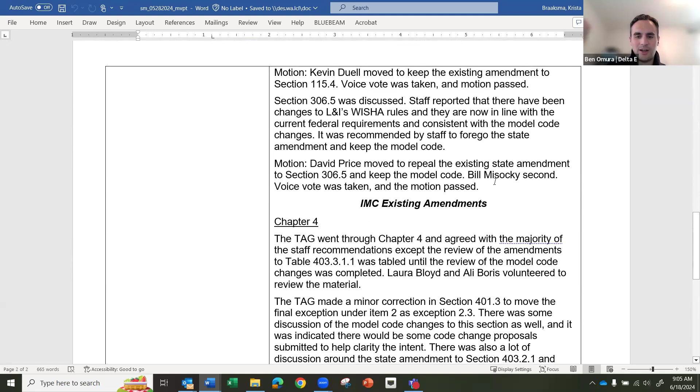Motion passes, thank you. All right, next item, this is the Tuesday, May 28th meeting minutes. I don't know if there's anything on here. Everyone's reviewed this, any comments or discussion, or are we good to move to approve the minutes? Move for approval. All right, motion to approve the minutes, is there a second? I'll second the motion. All right, motion and second. All those in favor, please say aye. Aye, aye, aye, aye. Any opposed? All right, passes.

And then we have the May 31st edition. All right, similarly, any discussion here from anyone? Move we approve the minutes of the May 31 meeting. Is there a second? I'll second. Thank you, all right, any further discussion? All right, hearing none. All those in favor, please say aye. Aye, aye, aye, aye. Any opposed?

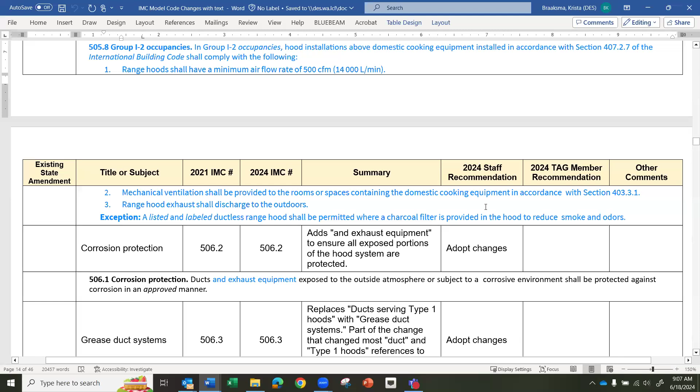All right, okay, to item 4 here. So Krista, please remind us where we left off. Okay, our last one was looking at the 505.7 and 505.8 on the new Group I-1 and I-2 occupancy requirements for hoods, and that brings us to 506.2, where it adds an exhaust equipment exposed to outside atmosphere shall be protected against corrosion.

Okay, great. And then I guess before we get into it, I know Dustin, you're on the call, and we had the committee meeting last week to discuss a little bit on the timeline, but I don't know if you or Krista could reiterate kind of where we're falling now with the report and moving forward in the process.

Yeah, I'd be happy to speak on that a little bit. So all the tags are not quite done with the reports, and so talking with the tag chairs and then asking the tag groups a question about our proposal periods. We are looking to open our proposal period here at the council meeting on Friday for a period of 90 days. That's going to be my ask of the council. And what that's going to do is be a little bit longer than our required proposal period of 60 days. It'll get the proposal period going and allow for people to continue to submit proposals after our reports are complete.

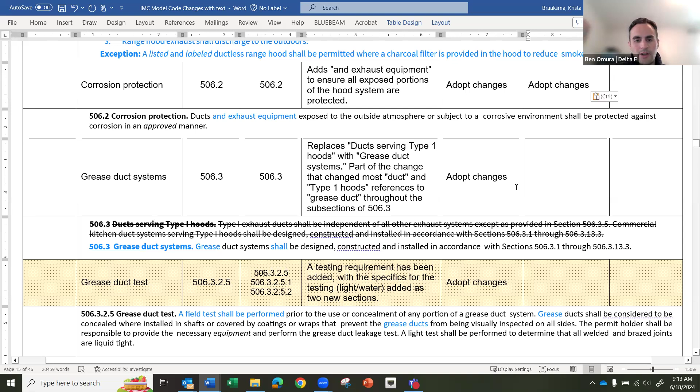Any discussion on this section from tag members or others? Hearing none, all those in favor of recommending adoption of the model code change to section 506.2, please say aye. Aye. Aye. Aye. Any opposed?

Okay, 506.3 is another one of those changes where they changed duct serving type 1 hoods to grease duct and just kind of simplified the language.

And I don't know, obviously we don't have the purview to look at making significant changes here, but it would be interesting to make sure that the requirements that were previously in 506.3 are still incorporated elsewhere. So it looks like they previously had an independent system requirement and maybe a couple other things incorporated here.

So looking down to 506.3.2.5, the grease duct test, is this the same test that was required previously when they were calling it class 1 hood duct, or hood ducts serving class 1 hoods or type 1 hoods? Is this the same test, or are there any additional requirements?

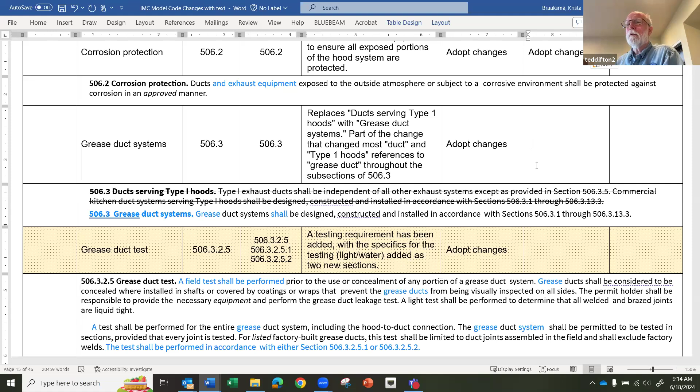I believe it's the same test. Well, there's actually two different tests that are now allowed as well. Correct. Yeah, I believe the pointers still direct you to this section for type 1 hoods. And I think either previously or as part of the exhaust section, the type 1 hood requirement would direct you into a grease duct system as well, which would then require the testing.

So basically this is a language issue that we're dealing with and getting it all on the same page. With that, I'll make the motion that we combine 506.3 with 506.3.2.5 and recommend approval of both of those sections.

Okay, there's a motion on the table for recommending adoption of model code changes to 506.3 and 506.3.2.5. Is there a second? I'll second. Yeah, all right. So the motion is seconded. Any discussion here?

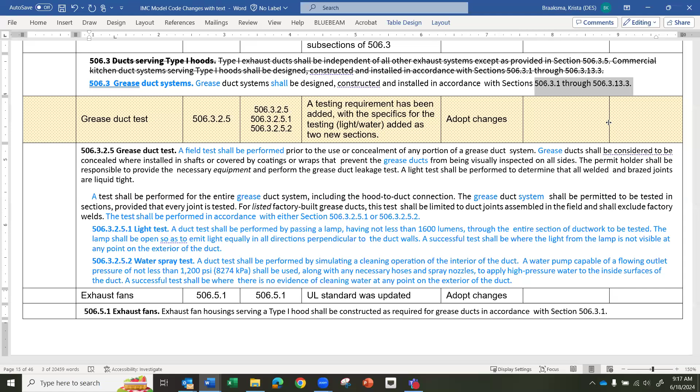Just a quick friendly reminder, type 1 hoods, would that service multifamily that's now being jacked into the commercial code? Well, yeah, I mean the type 1 hood requirement could be driven primarily by commercial cooking appliances.

And type 2 is for the smaller ones over the range. I'm just looking for clarification this morning. I'm sorry, I'm a little off. That's fine.

And residential appliances, the requirements for those can also vary. Like your typical range hood in a dwelling unit would not be considered a type 2 hood or a type 1 hood.

There's some other sections that will define what type of hood you would need for different applications and occupancies. My focus was that this type of testing isn't typically done in the residential world, so I was checking if we were including a new form of testing that wasn't there prior.

Understood. Once we get through the initial recommendations, if something comes up as potentially problematic or pushing undue cost, I don't see a significant change for cost requirements here, but we could look at that further.

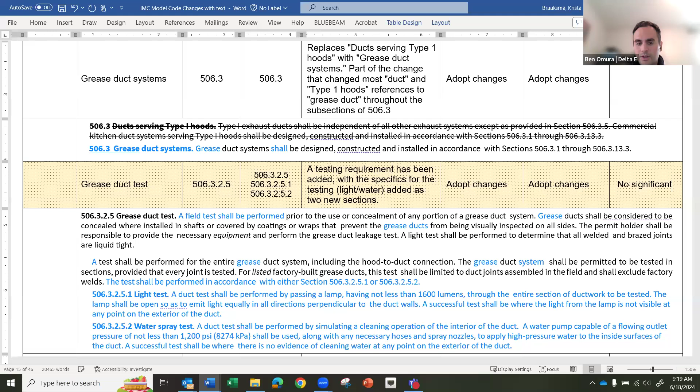Any other discussion or topics for this? Hearing none, all those in favor of recommending adoption for sections 506.3 and 506.3.2.5 model code changes say aye. Aye, aye, aye.

Next is 506.5.1, and that just changes the reference from 762 to 705.

I move we recommend adoption of this change. Is there a second? I'll second. Any discussion on this? It's my understanding as well that it's an update to the UL listing for these types of fans.

Hearing none, all those in favor of recommending adoption to section 506.5.1, please say aye. Aye, aye, aye, aye. Any opposed?

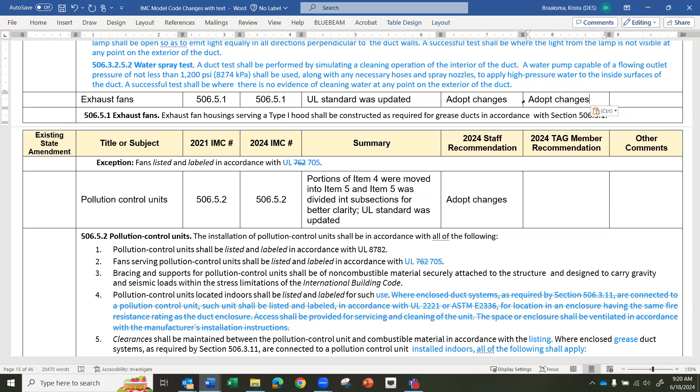506.5.2, the same change to the UL standard. Portions of item 4 were moved down to item 5 and broken out into individual subsections for clarity, so editorial more than anything.

I move we recommend adoption of these changes. Motion on the table, is there a second? I'll second. Any discussion here? Definitely appears like it's mostly editorial, similar to the fans update to the UL standard.

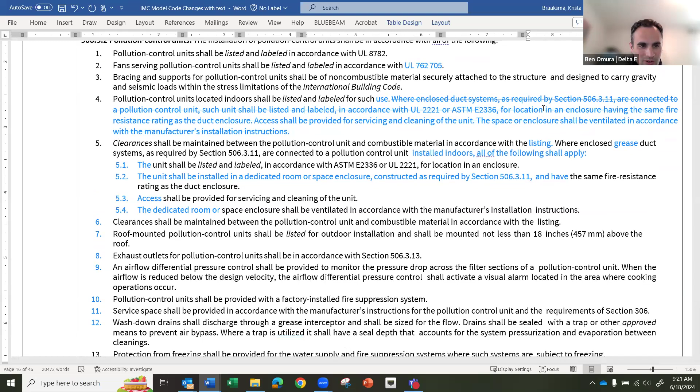All those in favor of recommending adoption to section 506, what is it Krista? 506, scroll up a little bit. 5.2, please say aye. Aye, aye, aye, aye. Any opposed?

507 commercial kitchen hoods - this was reorganized fairly significantly. This is a cover over all the changes we're going to look at here. They basically broke it into general, type 1 hoods, type 2 hoods, and light duty appliances was all moved into the type 2 hood section.

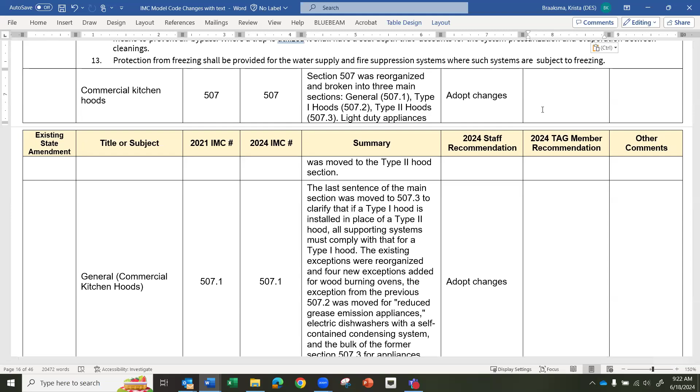507.1 had some language moved into 507.3. If a type 1 hood is installed in place of a type 2, all supporting systems must comply with type 1 hood requirements. Some new exceptions were added for wood burning ovens, and a couple for different UL listed appliances.

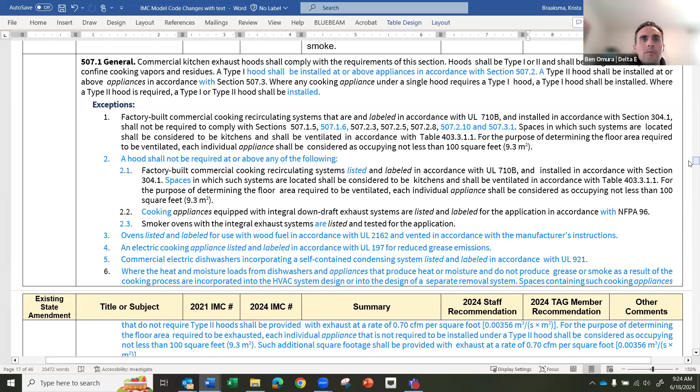Trying to fine tune my scrolling. Okay, so everything with the blue text is a change for the 2024 code.

Any initial discussion here for this section? I think there's probably more to unravel and align potentially with some of the allowances we have for different cooking applications, especially with exception 6 here.

I'm noticing that exception 6 used to be in the type 2 section, and now it looks like they've added that into the type 1 section, which I think is fine, but just a comment that the exception existed before under the type 2 hood section, I think that was 507.3. Right, and this is a general section rather than a type 1 section.

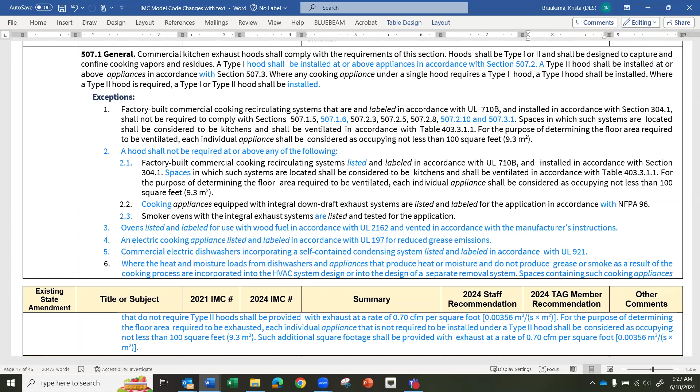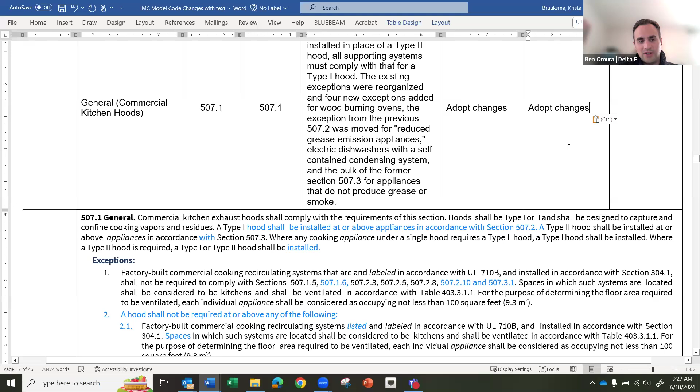I know the 0.7 CFM is the typical exhaust rate for a kitchen space as well, so that aligns and has been the go-to. Any other thoughts before moving to recommend adoption? Hearing none, all those in favor of recommending adoption of model code changes to section 507.1, please say aye. Aye, aye, aye, aye. Any opposed?

507.1.3 - they've added some specific requirements for using draft hoods or atmospheric burners in the same space containing a type 1 or type 2 hood. It looks like, Krista, you had marked this as potentially significant.

It kind of got there before, but now it has specific requirements. It used to just say provision shall be made, and now it specifies a self-closing device in a sealed enclosure. So it's a big change, but it might not have any additional cost because it was pretty much a requirement already - it just wasn't spelled out as specifically.

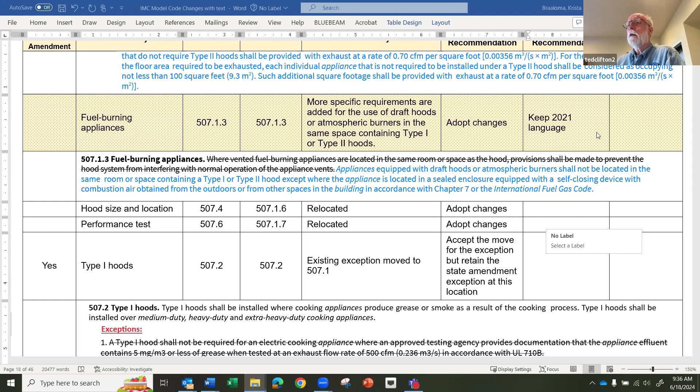I think, as you have it noted in the crosshatched area there, keeping the 2021 language would be my motion—that we recommend they keep the 2021 language, because this is ambiguous at best and could be very confusing in the field for inspections and such.

Well, it does use the term atmospheric, which means if you're underneath a type 1 or type 2 hood, you're not an atmospheric type device. Again, this would only be stuff that's being non-vented purposely, other than a pipe that's letting passive nature take care of itself. But Jonathan, I think you're assuming a certain definition of atmospheric burners, but a burner on a stovetop is an atmospheric burner.

Yes, and I agree with Ted, because if you read it, it can be moved into, because they just use the broad term kitchen appliances or equipment. So where are they going to draw the line, as it may cause confusion? They'd have to redesign the entire kitchen and put atmospheric appliances or regular stovetops or other equipment in a separate room, which I don't see. Maybe larger kitchens could afford it, but a smaller restaurant, there's no way. So from an inspection point of view, I would go with Ted to keep the old language, unless they can provide more clarity.

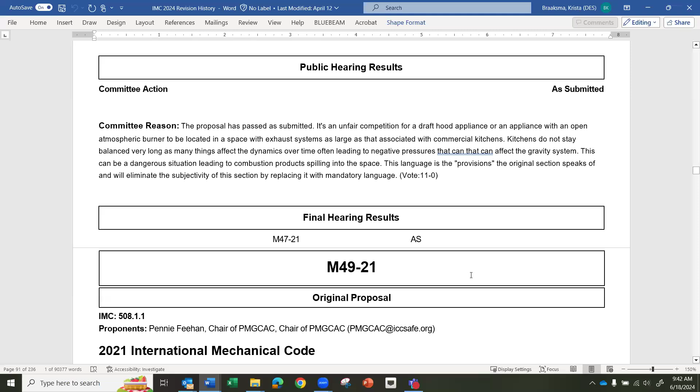Yeah, looks like, Krista, you pulled up this change proposal at the model code level. Right, this was adopted, the original proposal for the 2024 code, and it doesn't look like it had any public comments after the committee action. Looks like the language is similar, maybe a little bit... actually it looks the exact same. So I think the intent appears to be clear.

And thank you, Laura, for going through the commentary section. But that's not what's written in the section as well. So yeah, I think it definitely seems a little problematic and probably not great language as it is. But so, motion and the second to recommend retaining the 2021 language, and obviously we'll leave it there. Any further discussion?

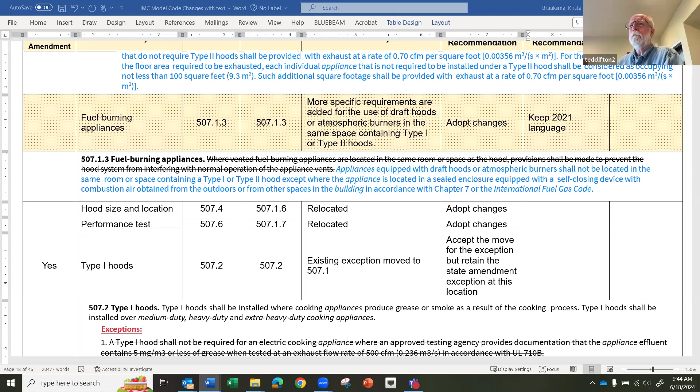All right, all those in favor of the motion to recommend keeping the 2021 language for section 507.1.3, please say aye. Aye. Aye. Any opposed?

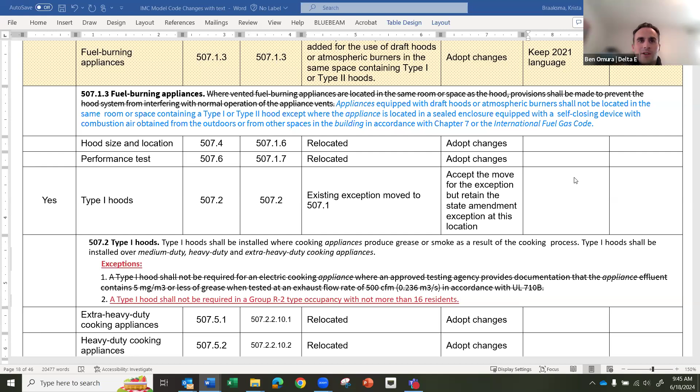Old section 507.4 was moved into 507.1.6, with no change other than numbering. Same with performance testing, 507.6 went to 507.1.7. These are all editorial changes, just numbering changes, not even editorial. So I don't know if you want to even address them as numbering changes. If the language is the same, yeah, the language remained exactly the same and just the number changed, moving them into that general section.

507.2, type 1 hoods. The existing exception was moved into the general section 507.1, and then we had that state amendment for type 1 hoods. There was discussion during the review of existing amendments that someone might want to pursue a code change proposal to ensure this wasn't exempting them from hoods entirely. I think this was consistent with things we talked about at the last meeting.

I will move that we recommend adoption of this change. That's for 507.2, Ted. Yes, 507.2. Is there a second?

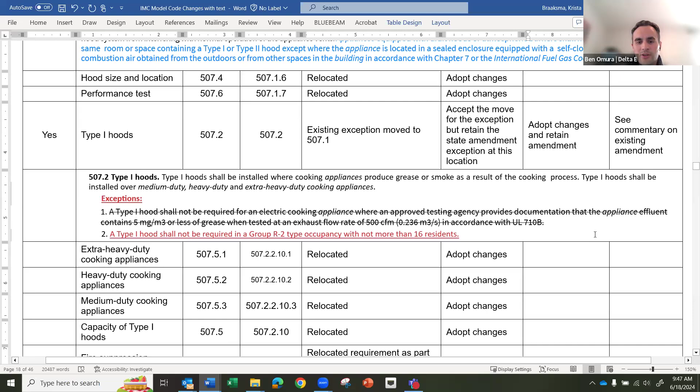Krista, really my understanding is that this is just exception 1 got moved into 507.1 that we already looked at. Right, this is, but exception 2 is still remaining in 507.2. Right, except it's now exception 1. Right, or just exception.

Is there a second to Ted's motion? I'll second. Motion seconded. Any further discussion? Hearing none. All those in favor of recommending adopting changes to section 507.2 based on model code changes, please say aye. Aye. Aye. Any opposed?

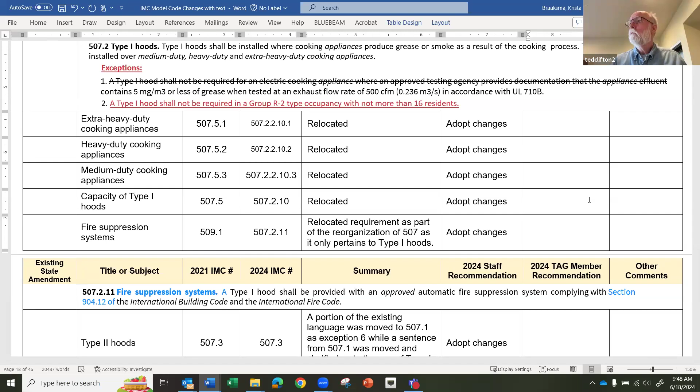507.5.1 through 507.5.3 were all relocations, just numbering changes without changes to the text at all. Same with 507.5, which was moved to 507.2.10. I guess that should be actually above the other ones, but my numbering skills weren't up to snuff on those.

509.1 was moved to 507.2.11, with minor editorial changes and a new title. Any discussion here? What was this one previously called?

I'll move that we recommend approval of 507.2.11. Yeah, this was previously titled 'Where Required', so it provides a specific code reference, so instead of where required, it's more clear.

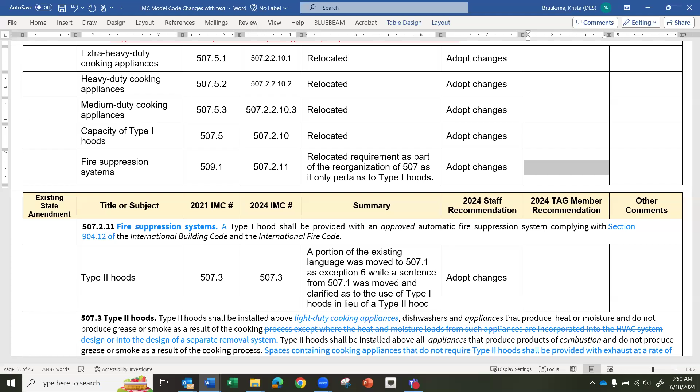Is there a second? I'll second. Motion is seconded. Any further discussion? All those in favor of recommending adopting changes to 507.2.11, please say aye. Aye. Aye. Any opposed?

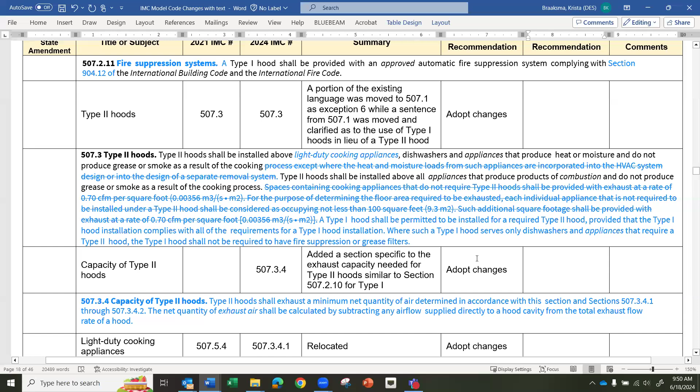Okay, 507.3. The struck sections were moved to 507.1 as part of exception 6. And some of 507.1 was moved in here since it pertains only to type 1 hoods used in lieu of a type 2.

Interesting. I move that we recommend adoption of 507.3. It seems consistent with the language we've been working through on similar issues all the way through here. Is there a second? I'll second. So motion is seconded.

Any discussion here? I guess one key thing to note is that they've included light duty cooking appliances into the requirements for a type 2 hood. Previously, it didn't have that specific reference, it just had appliances. That just makes things clearer.

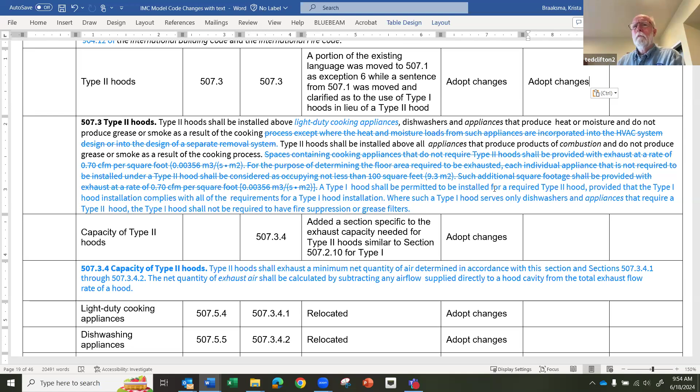New section 507.3.4 states what the necessary exhaust capacity is needed for type 2 hoods. There's a similar section 507.2.10 for type 1, and they just duplicated it for type 2.

Got it. Yeah, I think this is since they've kind of indicated light duty for type 2. Now I think they've moved the CFM per linear foot table on here. I see that as the next line item, noting the relocation.

Any other discussion for this one? This makes sense. I'll move we recommend approval of 507.3.4. I'll second it. Motion is seconded. Any further discussion? Hearing none, all those in favor of recommending adoption of the model code change for section 507.3.4, please say aye. Aye. Aye. Aye. Any opposed?

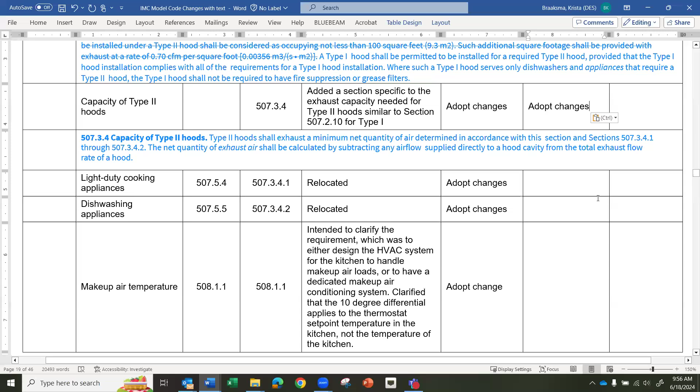And then 507.5.4, 507.5.5 were both moved up to be subsections under that new section 507.3.4, but no changes beyond just the numbering. Right.

508.1.1, makeup air temperature. Reworded to clarify how you design the system to handle the loads, whether or not you need a dedicated makeup air system.

Yeah, this is one of my favorite sections. It's always been super confusing the way it's written. And then how to apply the 10-degree temperature difference.

So I don't necessarily think the model code change solves the issues, but it maybe is a step in the right direction.

I'm going to move that we recommend adoption of this change, and if there's a second, we can have discussion. Is there a second? All right, we can't move on unless there's a second, or we'll have to move on to another section. I apologize, I'm having some technical difficulties with equipment. I'll second for Ted. All right, motion seconded. All right, Ted, what you got?

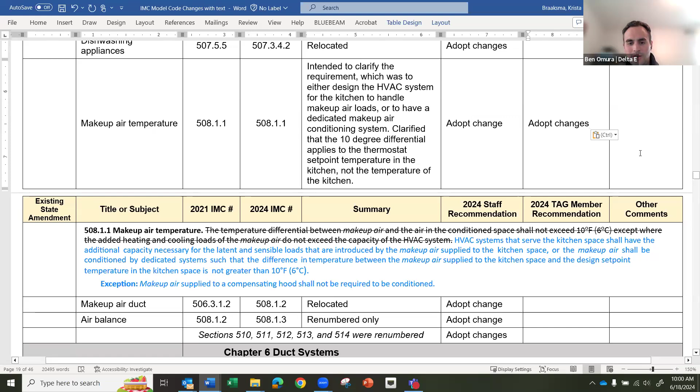Any other discussion for this one? Hearing none, all those in favor of recommending adoption for section 508.1.1? Aye, aye, aye, aye. Any opposed?

Okay, makeup air ducts and air balance were both just relocated and renumbered. And sections 510 through 514 were similarly just renumbered and unchanged based on the reorganization of section 507, well, mostly 507.

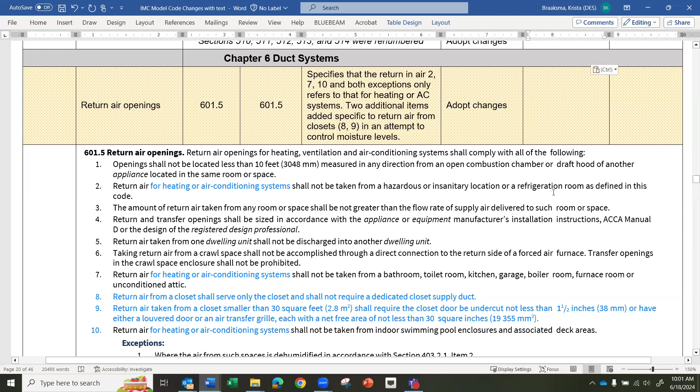All right, moving into chapter 6, return air openings. Specifies that the return air in 2, 7, and 10, and both exceptions, only refers to that for heating or air conditioning systems. Two additional items were added specific to return air from closets in an attempt to control moisture levels.

So a quick question on that: how does that relate to ventilation? We see a lot of return air into the ERVs, potentially coming from the bathrooms or from the shower spas. So this excludes for heating and/or air conditioning, but it doesn't necessarily exclude from ventilation. So we take from that, ventilation is an acceptable location?

Well, to start with, your return air to an ERV is coming directly from outside. It's your exhaust air in the HRV that is going to the outside, being returned from the bathroom to the outside. It's not return air, it's exhaust air. Okay, so you're qualifying return air as being outside air? The return air is, well, in the case of an HRV...

In the case of an HRV, you've got outside air coming into the house, and you've got return air going out of the house, and that return air can come from bathrooms or other places where you need to otherwise ventilate that room. So really, it's not return air at all, it's exhaust and supply air. Exhaust air, exactly. Exhaust and supply air, okay. Yeah, exhaust and supply would be the right terms for that, and return air wouldn't actually be an appropriate name for that. Okay, so that makes more sense.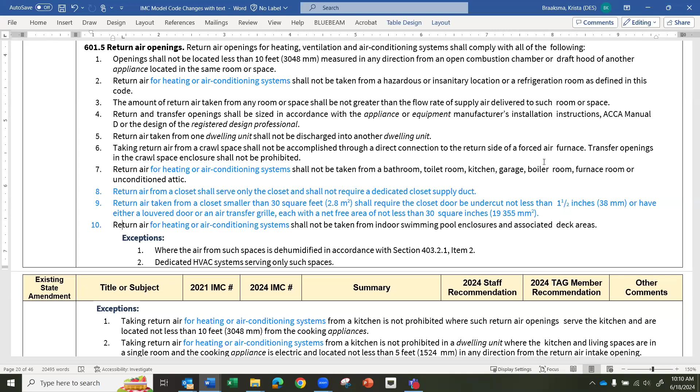Are we able to get a little bit more in depth with our recommendations for approval by saying something's effective? Requires approval of this requires a clear definition with regards to HRVs and ERVs.

So for this section, since we've kind of discussed previously, we can recommend not adopting the model code changes and using the language from the previous code cycle, is my understanding. And then we could flag it as potentially needing a code change to either clarify a definition or clarify the section. But that wouldn't necessarily be part of the initial report unless we had the language that we wanted to use developed.

Perhaps with number 7, they're trying to be specific and not exclude ERVs - that's my understanding of how this is. Return air for heating or air conditioning systems is very specific: should not be taken from bathroom, toilet room. Whereas other items here could be applied to heating, ventilation, and air conditioning systems, but they're adding the specificity of the systems in number 7.

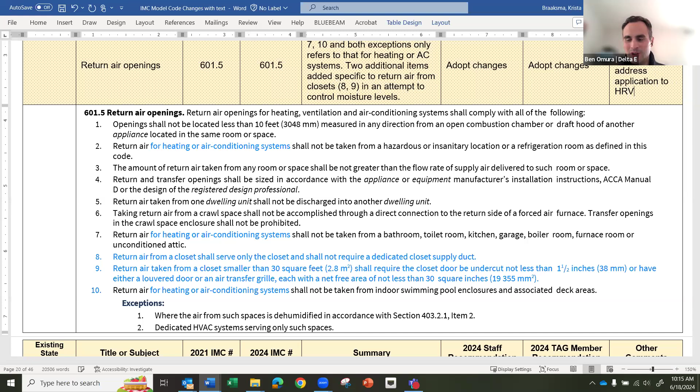Anyone want to volunteer for either taking on the assignment or sharing the assignment? Okay, if not, I guess we'll need to assign someone to that. Ted, I don't know if you want to be a part of that, or is there someone else that would like to throw their hat in? Yeah, I've never done a code change proposal and I really don't have time to start right now.

Right. If not, we can leave it as something that we assign following the meeting and keep moving. So, I'll leave it there unless someone wants to speak up.

When would be the due date for that particular code change proposal? So as Dustin mentioned earlier, the proposal period, which would be a 90-day window, would potentially open following the council meeting this Friday. So obviously that's the deadline to get proposals submitted, I believe. Yeah, so pretty much 90 days from now.

Jonathan, have you ever written a code proposal? Last code cycle, I got my toes wet a little bit, so to speak, but I did have help from great people. So I wouldn't mind doing this again as long as a couple of folks wouldn't mind chiming in and giving me some help with it.

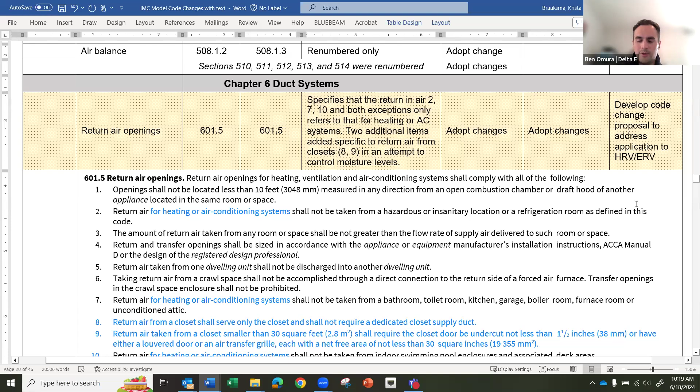With that, any further discussion? All those in favor of recommending adoption of model code changes for section 601.5, and indicating that we're going to have a group led by Jonathan to develop a code change proposal, please say aye. Aye.

602.1 was split into a general section with 3 subsections, pretty much all editorial. There is an existing state amendment.

I'll move to recommend adoption of 602.1.1, 602.1.2, and 602.1.3. Is there a second? Second. All right, so the motion is seconded. Any discussion here?

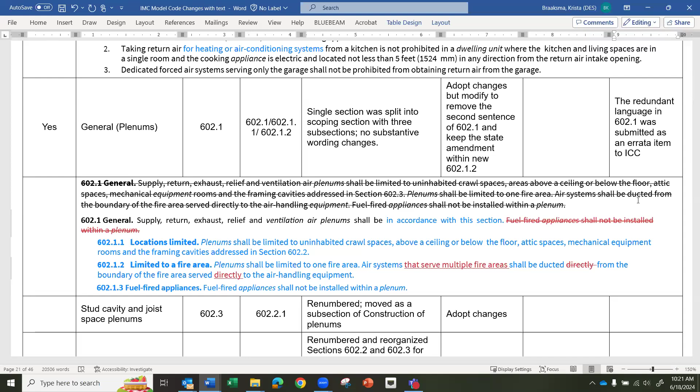I did submit this as an errata item to ICC because they kept the fuel-fired appliances shall not be installed within a plenum language, and then had that also as language in the new 602.1.3. So I think that was just an editorial error on their part for the first edition. Got it. So did we discuss this during the state amendments section, Krista? Either way. We did, I don't remember that we had anything specific to say about it. Okay, yeah, I wouldn't think so. I think it makes sense that we wouldn't need that language twice.

Any further discussion for this one? Just to be clear, the strike-through for the fuel-fired appliances, that's in the model code. They have it listed twice in that area, and then 602.1.3 as well.

All those in favor of recommending adoption of model code changes to section 602.1, including subsections, as well as the staff recommendation to strike the redundant language, please say aye. Aye. Any opposed?

602.3 was moved to 602.2.1, just to be a subsection of construction of plenums, but there was no language change, just the numbering change. Materials within plenums was renumbered, but it was also revised for clarity.

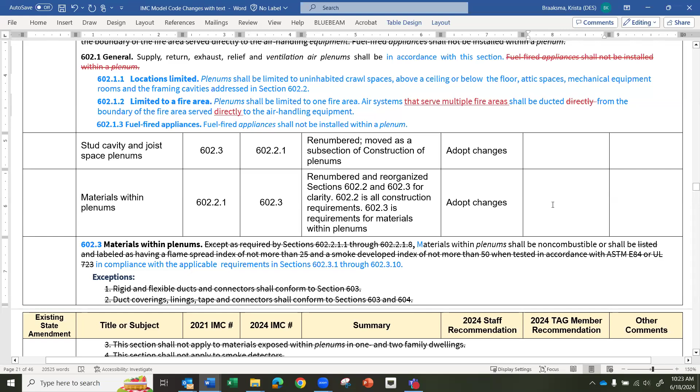And it had material moved into 2 new subsections. I would recommend adoption of 602.3 and its subsections down through 602.3.2.

I would second that, but I would caution that number 1 is in conflict with the energy code. But this is commercial, so I may be wrong here, I am not a commercial expert. I backtrack, I apologize. But it does say 1 to 2 family dwellings here, which is why I said, see, I knew I wasn't too crazy, just slightly crazy. It says plenums in 1 and 2 family dwellings, which is residential code. Residential code says you will not use plenums at all for delivering ductwork system, whether it's ventilation, heating, or cooling. This could be like an R2 occupancy in a commercial building, of course.

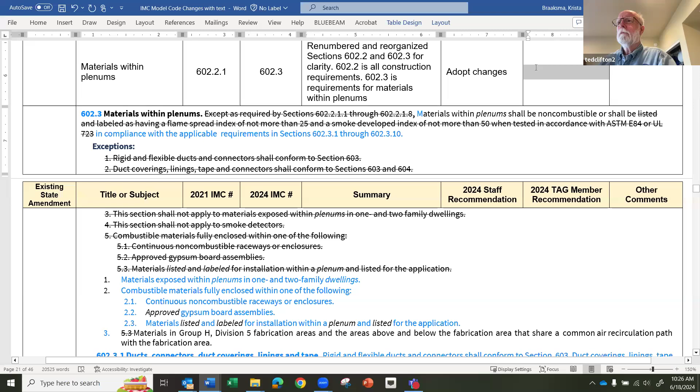All those in favor of recommending adoption for model code changes to section 602.3, including subsections, please say aye. Aye. Any opposed?

And Krista, have you, on the staff side, looked at any alignment with NEC requirements or other similar requirements that might have already been existing? Looking at the code change proposal at ICC, this was in alignment with the NEC, and this was just included in the mechanical code for convenience. They had the same UL listing requirement.

I'm curious what the word discrete means here. Does anybody have a clue there? Is there a definition somewhere? I don't think there's an official definition of it. I'm not sure when or if they've always been using that language. When I think of discrete, I think of having my clothes on. So, but if I applied that definition, this would occur to bare wires, for example, as not being discrete, whereas a jacketed wire would be discrete under that definition of discrete. But why is that word in there, and what does it mean?

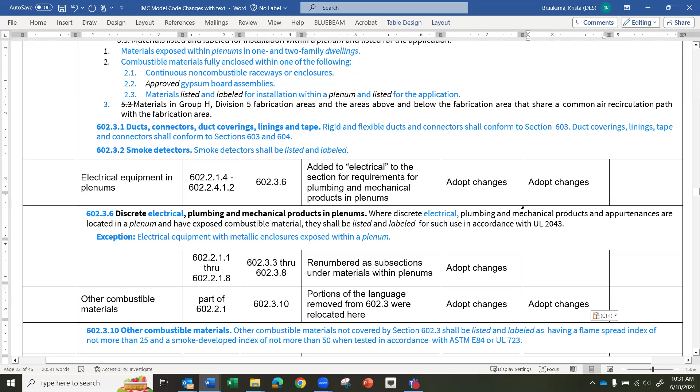All right, any additional discussion? I don't know if we look at 602.3.10 much. And this is, it looks like, Krista, this was moving language from previous 602.3. Right, this was just part of 602.3 that got moved into its own specific section for other combustible materials. Got it, okay.

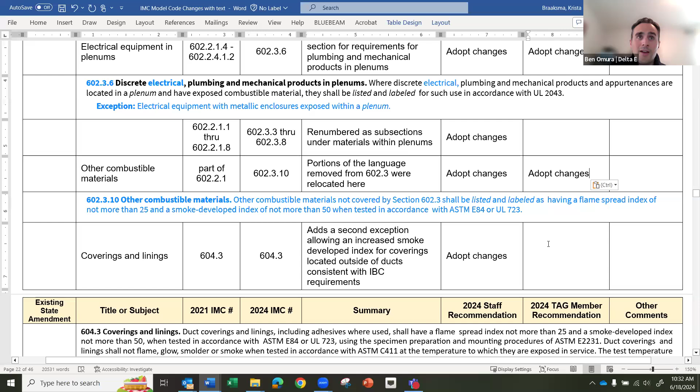All right, any other discussion for these two? None. All those in favor of recommending adoption of model code changes to 602.3.6 and 602.3.10, please say aye. Aye. Any opposed? Okay.

604.3 added another exception allowing an increased smoke developed index for coverings located outside of the ducts, consistent with the IBC.

I'm just trying to recommend adoption of these changes. Motion to recommend adoption, is there a second? I'll second the motion. Any discussion? I was just trying to parse through the difference between the main section requirement and the new exception. They're very similar.

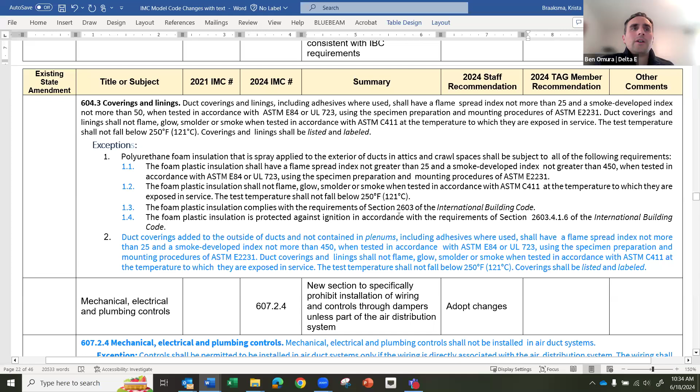A new section 607.2.4 prohibits the installation of wiring and controls through dampers unless they're part of the air distribution system. And then there's the subsection that says you can't do it unless it's allowed by their listing. And then, yeah, the section after this is for not installing through fire smoke dampers or fire dampers.

So move that we recommend adoption of 607.2.4 and 607.2.4.1. Second. All right, motion is seconded. Any other discussion here? I don't know.

I think the exception language is a little bit ambiguous. I think it probably makes sense to allow it for sensors and other things that are needed within the duct, but I don't know if anyone's really doing this, but using the duct as like a pathway for your control system or something like that, which serves the air handling system, but really should be routed outside of the duct, because it would still be related to that same system. But...

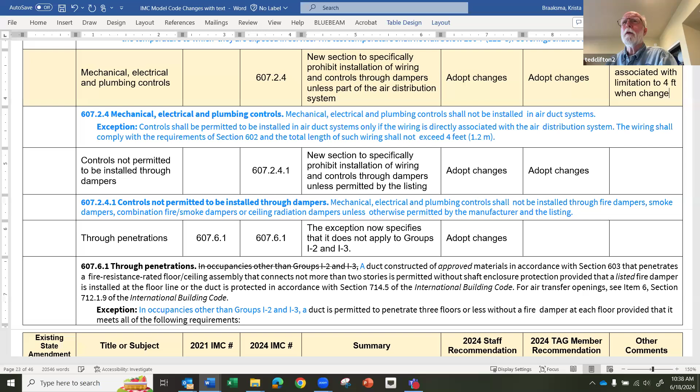And I guess we have a motion on the table for, or do we have a motion? I don't know, I think I had made the motion for 607.2.4 and 607.2.4.1, and I think Laura seconded it, if I remember right. That's correct. Yeah, based on Brad's feedback, it does seem like it would make sense to flag it for a significant cost change.

If there's something we'd like to develop, there's a code change proposal we want to get on the tracker or list for upcoming things we want the tag to look at. Let's think about that. Any other discussion for the motion on the table?

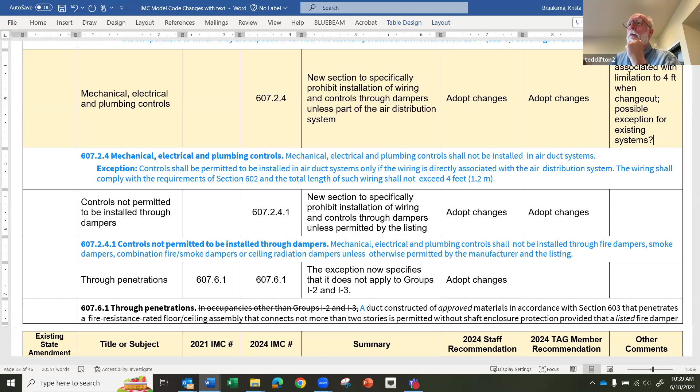I would accept what you wrote in the right-hand column about cost association being limited to 4 feet when change-out is possible, with an exception for existing systems. I'd accept that as a friendly amendment to my motion. Laura, do you accept that also? I was just curious how they came up with the 4 feet. But yeah, I can second that amended motion.

Any other discussion? All those in favor of recommending adopting the model code changes for 607.2.4 and 607.2.4.1 with the flag of significant change and opening up the opportunity for a code change proposal, please say aye. Aye. Aye. Aye. Any opposed?

Okay, so 607.6.1. Rather than noting occupancies other than Groups I-2 and I-3 at the beginning, they stuck that language into the exception instead. So it specifies that it does not apply to Groups I-2 and I-3. Basically the change is that the exceptions do not now apply to Groups I-2 and I-3, but still apply to everything else. And the main paragraph would now apply to Groups I-2 and I-3.

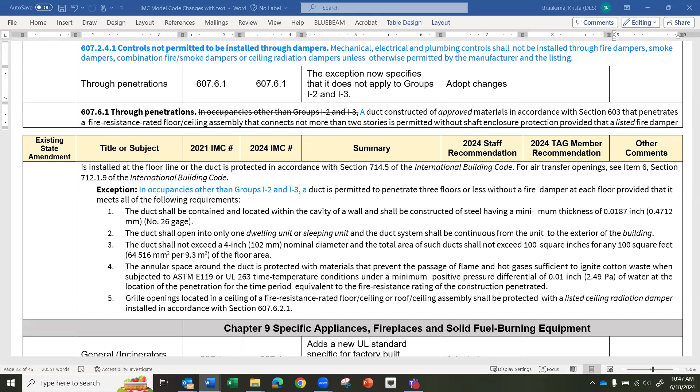Yeah, it looks like in the IBC it read the same previously. I don't have the code changes for the IBC up, but it looks like it read the same in 2018 - that's what I have up right now. Yeah, 2024 looks similar, has pretty similar language. Okay, all right. Any other discussion here?

I don't know if someone wants to make a motion. I'll move that we recommend adoption of - wait, 607.6.1, I'm sorry, where are we? Oh I see, that was the reference. Okay, I don't see the number we're working on here. Oh it's on the next page above. 607.6.1, okay I got you. I'll second the motion. Thank you. Motion seconded, any further discussion here?

All those in favor of recommending adopting model code changes for section 607.6.1, please say aye. Aye. Aye. Any opposed? All right, okay.

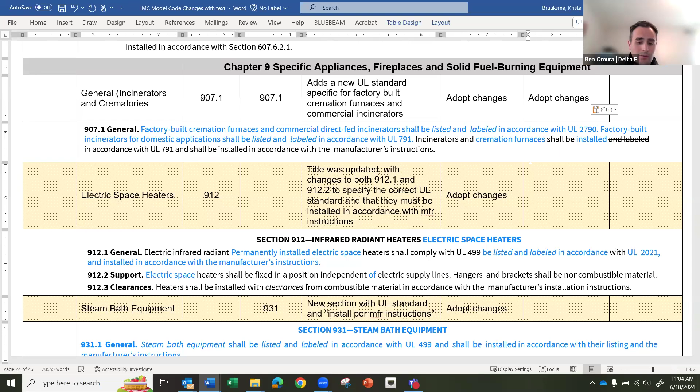912, the title was changed from infrared radiant heater to electric space heaters, and changed to permanently installed, and changed the UL standard. I'll move that we recommend adoption of 912.1, 912.2, and 912.3. I'll second.

Motion is seconded. Krista, you flagged this one as potentially significant. Is it just due to the UL listing change, or are there other considerations you were seeing? I don't remember exactly why I did this. I think it was just the expansion from radiant heater to all electric space heaters, maybe. And it seems to have let anything that's not permanently installed, in other words a freestanding thing you plug into the wall, not be covered by this. So it let certain types of electric heaters off the hook. This is only permanently installed.

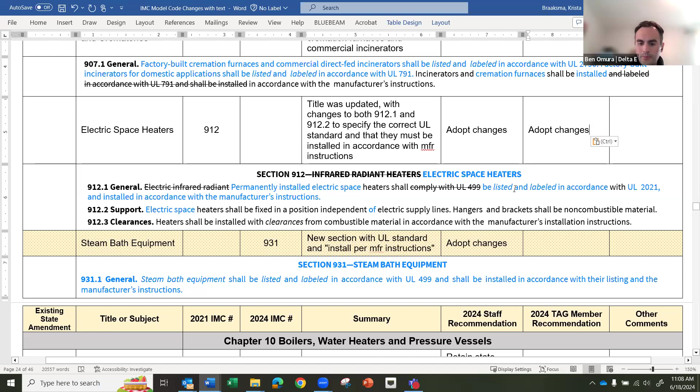Next one, new requirement for listing and labeling in accordance with UL 499. I'll move that we recommend the adoption of the change to 931.1. Is there a second? I'll second. Any discussion here?

Hearing none, and Krista, it looks like you flagged this one too. Is it because this is regulating a new piece of equipment that wasn't previously regulated? Yep, at least under this code. Any other discussion? All those in favor of recommending adoption of section 931, please say aye. Aye. Any opposed?

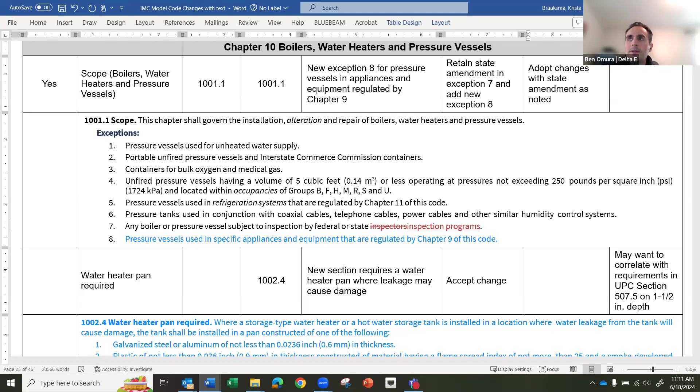Okay, a new requirement for water heater pan in section 1002.4. There are some minor differences between this and the requirement in the UPC on the depth. Do we know the 2024 UPC requirement yet? I think it did not change, but I haven't double checked it. Okay.

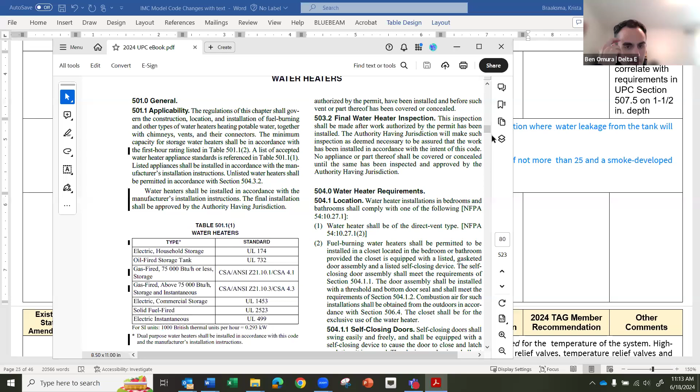Well, it looks like there was a significant change there. This seems to cover different issues.

Well, they both say they're for where water leakage may cause damage. Yes, but the IAPMO language covers different issues related to it. For example, the drainage pan depth, the size of the drain pipe. It doesn't address the gauge of the material that it's made out of, or the flame spread of what it's made out of. So it's covering different issues regarding that pan. Yeah.

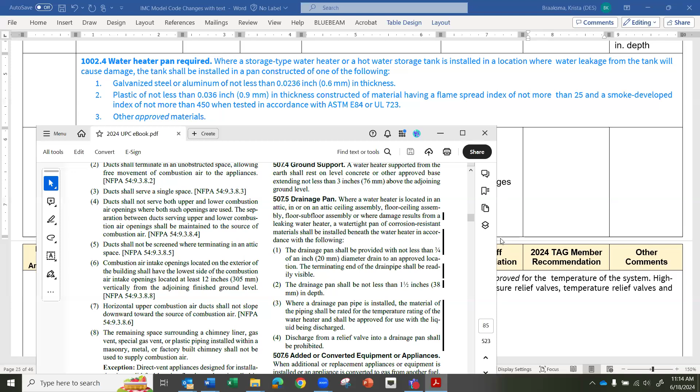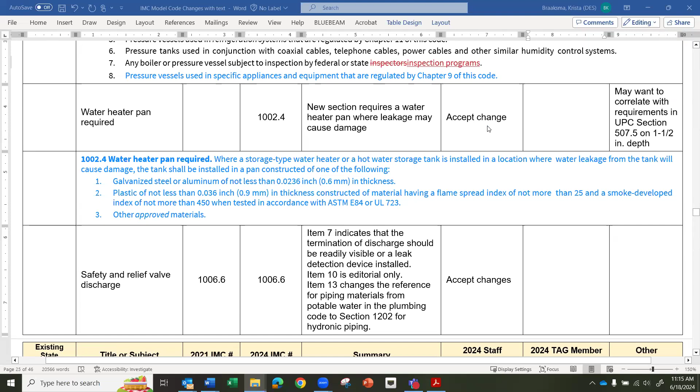I don't see any conflicts, so if I haven't already done so, I'll move that we recommend adoption of 1002.4. Is there a second? Second. Motion is seconded.

Okay, so I was just looking at the UPC, which doesn't pertain to our state, but it does look like it has similar requirements for materials in it. It doesn't specify the depth, or excuse me, I was looking at the IPC. But I'm wondering why they have it. I guess it's for both codes, but all right.

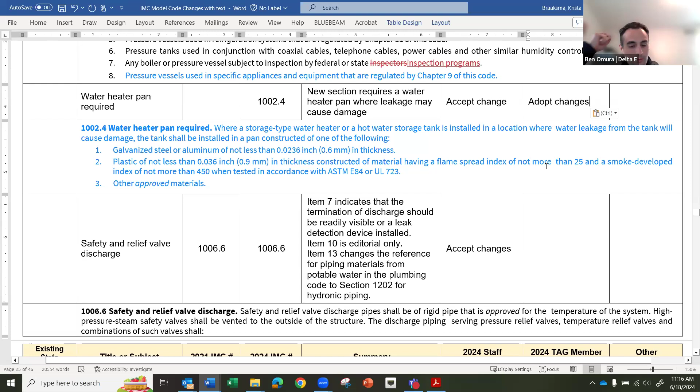Any other discussion for this one? All those in favor of recommending adopting model code changes to section 1002.4, please say aye. Aye. Aye. Aye. Aye. Any opposed?

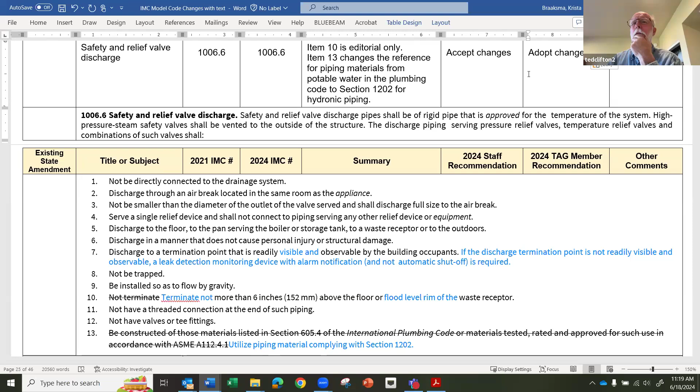Any other input here? All those in favor of recommending adoption of model code changes to 1006.6, please say aye. Aye. Aye. Aye. Aye. Any opposed?

Okay, and that brings us into refrigeration. And I know, Laura, I don't know if you had a chance to go through this in much detail. I know you're thinking about taking a look at it ahead of time. I don't know if there's anything you want to indicate before we started going through these various sections. There's a lot of changes overall for chapter 11. But I don't know if there's anything else you wanted to mention.

I actually haven't been able to study it like I had hoped. But yeah, looks like it is pretty substantial. And yeah, a lot of it's taking a lot of the ASHRAE 15 changes and updates that have been implemented for the higher flammability refrigerants and incorporating them into the code, which is good to allow for these types of systems to have some sort of requirements around them to provide a pathway to use them, in my opinion. But there's just a lot of changes that have been introduced with that as well.

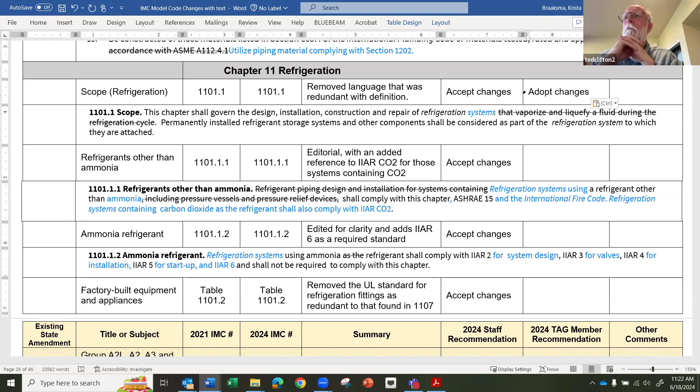Okay, the next one is mostly editorial. They add the reference to IIAR CO2 systems for CO2 systems and referencing the fire code requirements in addition to ASHRAE 15.

I'll recommend or move that we recommend adoption of the changes to 1101.1.1. Is there a second? I'll second. Any discussion for this one? All those in favor of recommending adoption of model code changes for 1101.1.1, please say aye. Aye. Aye. Any opposed?

Okay, 1101.1.2 for ammonia refrigerants. Basically just editorial and adding a reference to IIAR 6.

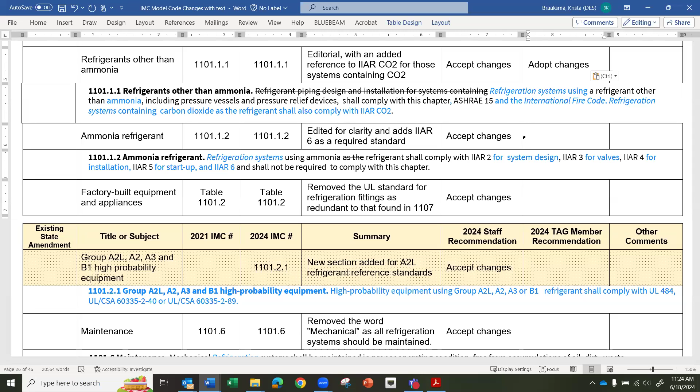I'll move that we recommend adoption of 1101.1.2. Is there a second? I'll second that. Any further discussion for this section?

All those in favor of recommending adopting model code changes to section 1101.1.2, please say aye. Aye. Aye. Aye. Aye. Any opposed?

Okay, on table 1101.2, they just removed the UL standard reference for refrigeration fittings as redundant to the requirements in 1107. And if anybody would like to, I can pull up the table so you can look at it. I just didn't include the whole thing.

So I will move that we recommend adoption of 1101.2.1. Reason being that this is not really something we have a choice about. These are the refrigerants that are coming down as a result of US EPA action, and they have to be adopted by the first of the year, whether we like it or not.

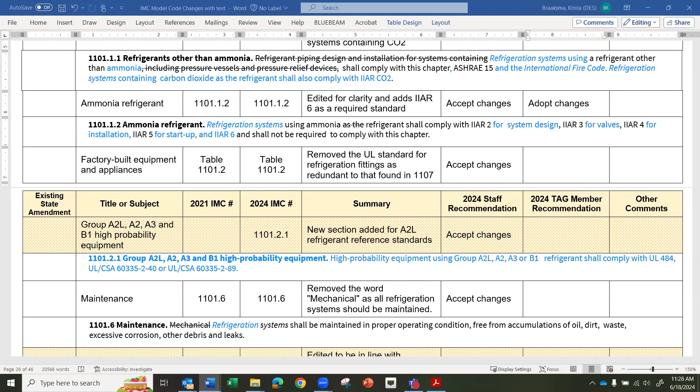A hand up, Harshad, see your hand up in the audience. Yeah, my name is Harshad Inamdar, I'm a research engineer with Rheem Manufacturing. I think the only problem was that the reference to UL 207 was included here, but it really applies to fittings, and ASHRAE had proposed to delete that row in the previous code cycle. It's referenced in section 1107.5, which applies to pipe fittings, so that's the appropriate location to reference UL 207. Great, thank you for the background on that.

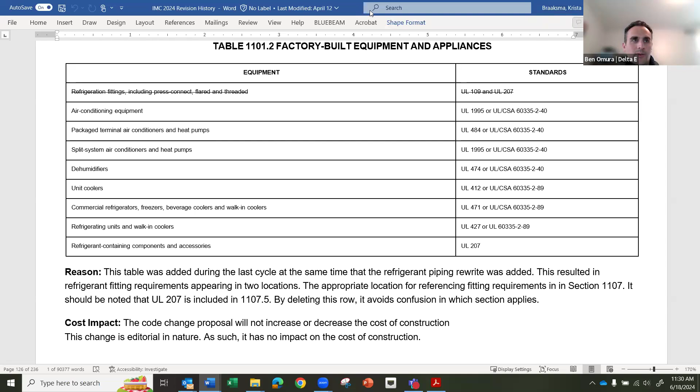Yeah, so I'm fine with including this table with the motion to recommend approval. Is there a second for Ted's motion? I'll second. All right, so the motion is to recommend adoption for model code changes to table 1101.2 that we're seeing, and then also for the new section 1101.2.1 for group A2L, A2, A3, and B1 high probability equipment. This definitely qualifies as impactful.

All right, any discussion for either of these items? I guess one thing that I've noticed is that ASHRAE 15 provides definitions for high probability equipment, but it's not included in the IMC language. So it does require you to reference ASHRAE 15 to determine if your equipment is high probability. It's maybe not as user friendly for some of these changes, but I think that could be clarified. There's some potential proposals that I'm sure there's definitely going to be some proposals around these changes as far as I know. But no objections on my side to the model code language.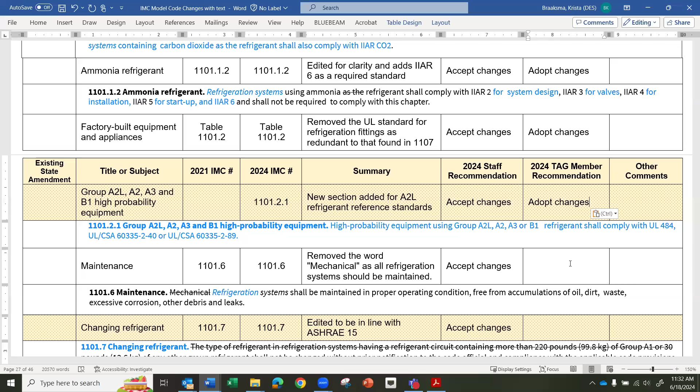All right, anyone else have any thoughts for this section or these two items? Harshad, go ahead. Yeah, this is Harshad. I'm a research engineer with Rheem Manufacturing. The only context I can add is when EPA approved the use of Group A2L, A2, A3 refrigerants through SNAP, the Significant New Alternatives Policy program, through SNAP Final Rules 23, 25, and then the recently published SNAP Final Rule 26 for commercial refrigeration equipment. These UL standards are explicitly referenced by EPA in the SNAP approvals, so equipment must comply with UL 484, 60335-2-40, or 60335-2-89 if we are to use Group A2L, A2, A3 refrigerants in the respective application categories. So we have to comply with EPA's final rule, and this is the only way to do it.

Thank you again for that context. And this will also align with some of the Washington State Department of Ecology requirements for A2L and low GWP refrigerants. All right, any other discussion here? There's definitely more refrigeration stuff that we'll go through.

All right, all those in favor of recommending adoption for all of the changes to table 1101.2 and section 1101.2.1, please say aye. Aye. Aye. Any opposed?

Okay, 1101.6, they just removed mechanical from mechanical refrigeration to say that all refrigeration systems need maintenance. I'll move to recommend adoption of 1101.6. Is there a second? I'll second. All right, any other discussion for this one? Hearing none, all those in favor of recommending adoption to section 1101.6, please say aye. Aye. Aye. Any opposed?

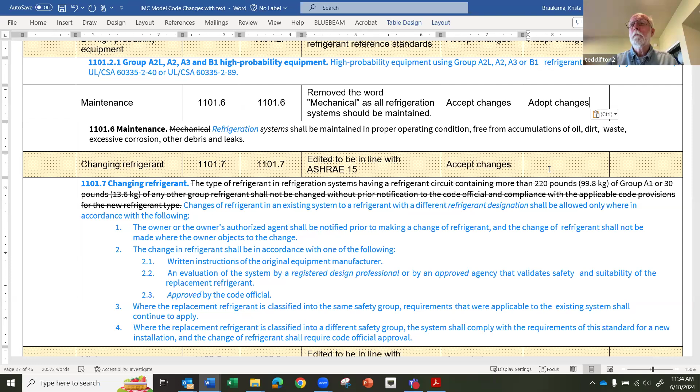Okay, 1101.7. This was pretty extensively revised to be consistent with ASHRAE 15 on changing refrigerants.

I'll move for recommending adoption of 1101.7. I'll wait for a second, and then I have some comments. Is there a second for that? I'll second. Go ahead, Ted.

My comment is that I understand it will be very, very difficult, if not impossible, to actually convert existing equipment over to the new refrigerant type, because for one thing, they fall into a different safety group classification. So there's a lot of additional requirements for the equipment itself to handle the new refrigerant. So this does appear that it would allow for that to happen if the manufacturers make all the right parts and pieces and add-ons. So it's as good as we can do for now, but it may need some additional changes within the next couple of years.

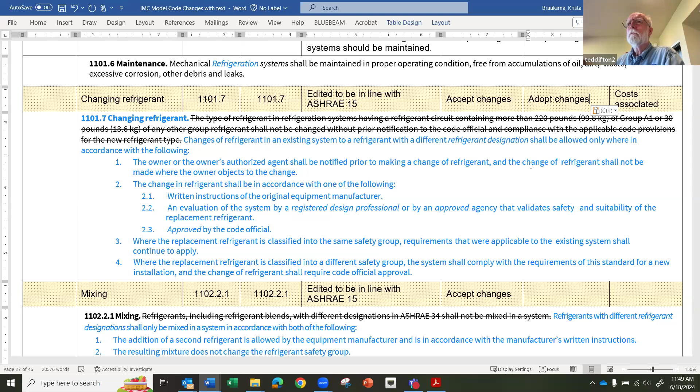Yeah, I'm not too sure what more to say, but I mean, it is what it is. I know it's coming. I'm just saying that as this is written, there's a cost impact. And it's gonna lead towards changing out equipment that may be fixable, at a lower impact to people.

And yeah, I think Ted, thanks for just flagging that and getting that perspective, because I think it's important to make sure that's known and we have it flagged for the report, just given that it's likely to affect a lot of activities going on in the industry. So appreciate that.

I don't know if we want to look at any other action at this time, but if we have a motion to recommend adopting this on the table, if there's any further immediate discussion, let me know, but otherwise just gonna move on to voting on it. So hearing none, motion is to recommend adopting model code changes to section 1101.7. All those in favor, please say aye. Aye. Aye. Aye. Any opposed?

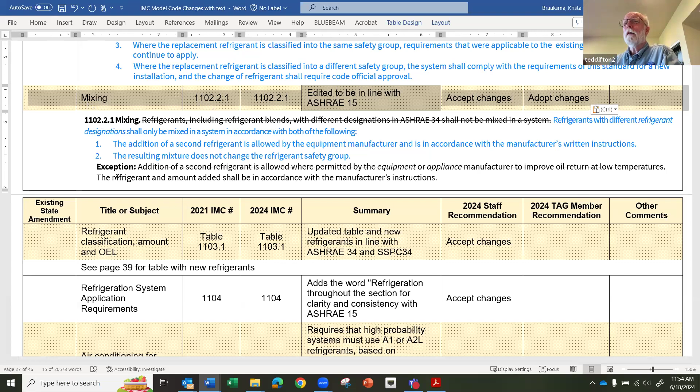Yes, no. Anyone? I think it allows a possibility that wasn't there before. And while it's not a negative cost increase issue, I think it is kind of significant because it allows for some possibilities as the chemistry develops and the various manufacturing groups find ways to work with things that we can't work with today. It makes it available. So whether that's considered significant or not, I don't know.

Yeah, and even the previous exception seemed to be a little bit more narrowly defined than what is in the new language, except for the requirement for staying within the same safety group.

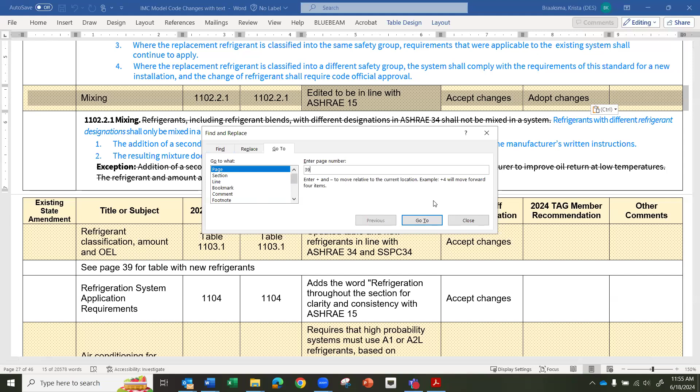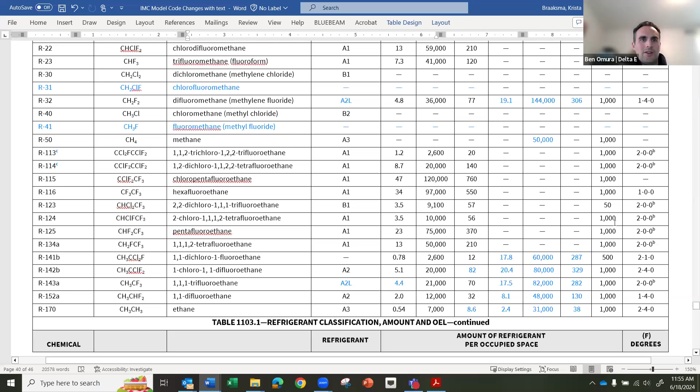All right. Okay, so I think we went through that. But okay, the next one. We're looking at updates to the table with new refrigerants. This is like 6 pages of table. Yep. So you can see there's... they've actually added a new column too, right? For LFL.

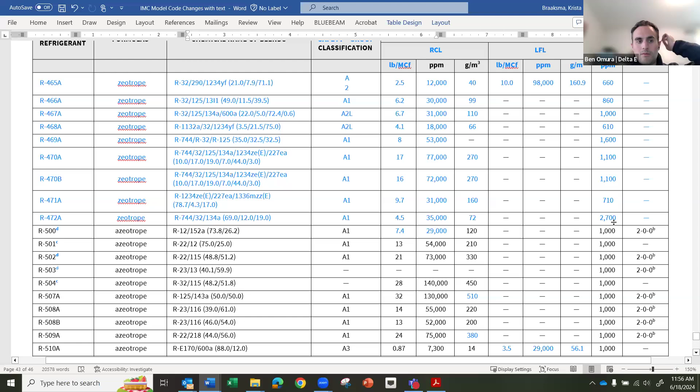All right. Anyone have any items to discuss for the table? I had no idea there were that many ways to get cold. If we're making people hot too. We're making things our hot. June weather is doing it enough, right?

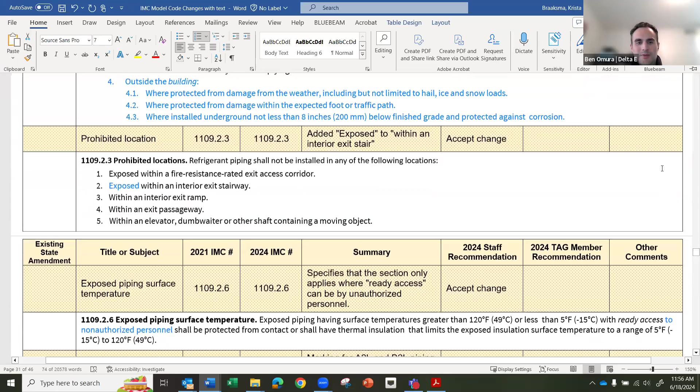All right. Any discussion for the table? Obviously, this is really just taking new information, adding and adjusting some items.

See, we need to scroll back up just a little bit more. No, this is where we are. That's where we are. Table 1103.1. Oh, that's the table. But we had a motion on the floor up above that. But we already voted that motion, didn't we? And I need to keep going up. There's a couple that you've shown now that haven't even been brought up yet.

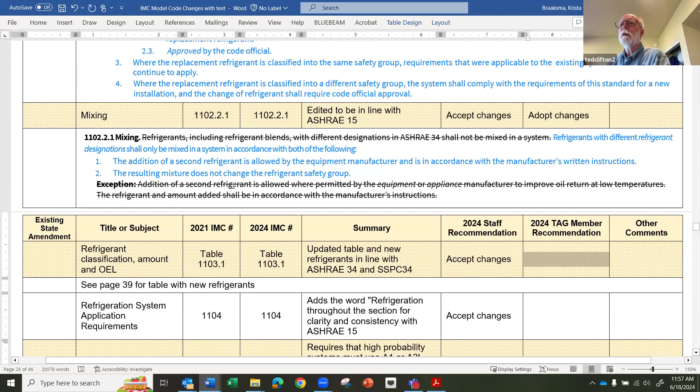The one above that's for the replacement. Right, that was the last one we dealt with. No, we did the mixing. Okay, yeah, you're right, and you made the motion. Mixing with what, it was still, yeah, the motion had been made, but it hadn't been voted on yet, I don't think. Yeah, it was. Yeah, okay, I have it carried, no opposing. Okay. Yeah, I thought we had gone to the table without having done that.

So do you need a motion to accept the changes to the table? Yes, so moved. All right, is there a second? Second. All right, motion seconded. Any discussion on the table items?

There's obviously a lot of changes, but it's gonna probably be what it is. I'm hearing none. All those in favor of recommending accepting changes to table 1103.1, please say aye. Aye. Aye.